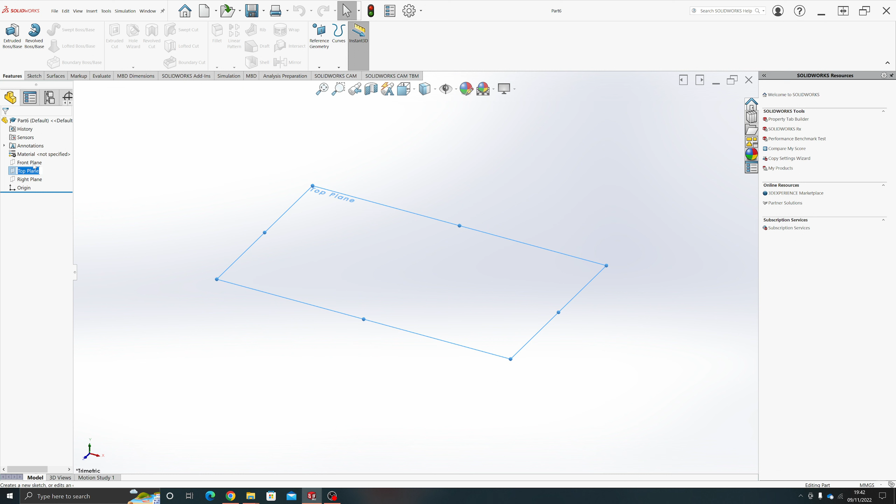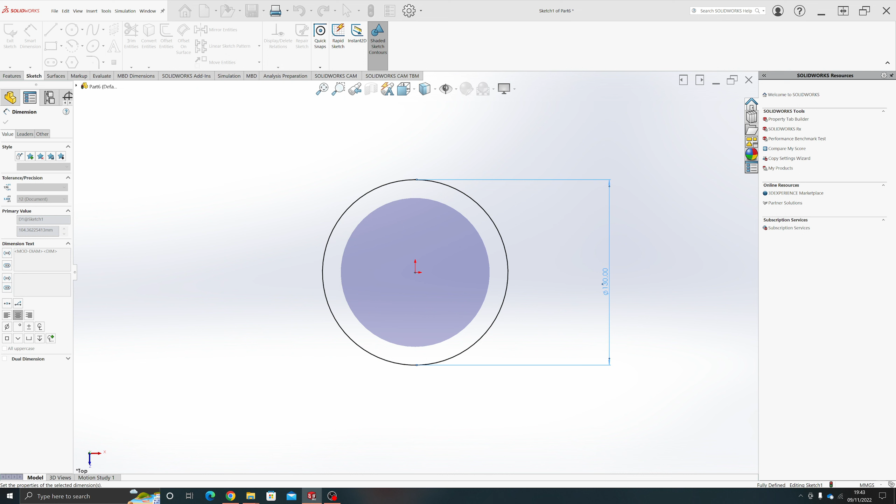So we're going to start on the top plane. What we're going to do is draw the base first, so I'm going to do a cylindrical base like so, and smart dimension this. This is a nice, quite quick, easy one to do. For our dimensions, I'm going to do mine as 130 millimeters diameter. I'm going to do a feature, just extrude that up, and make this 12 millimeters thick. So it's quite a good size base like so.

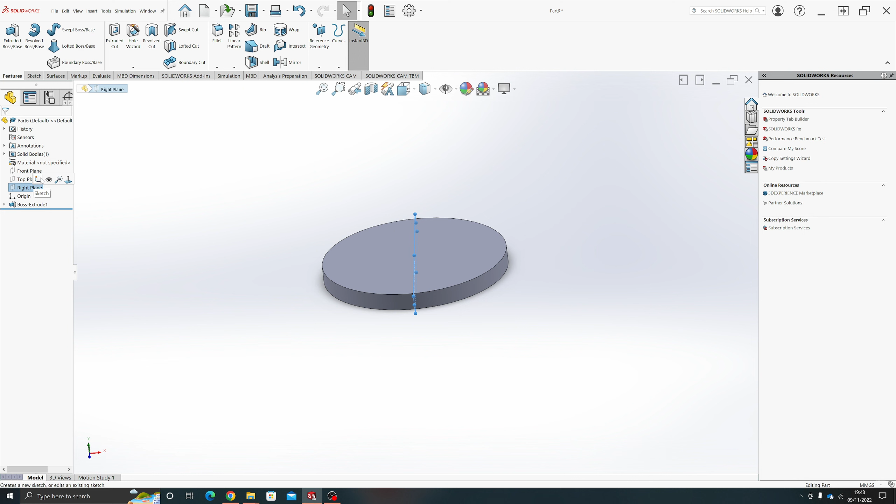Okay, and then I'm going to draw on this face here really - actually no, I'm going to draw on the right plane instead now, and we're going to do normal to. Just ignore the fact that this plane is actually down here - you can drag them up, but just remember that planes are actually infinite. They will stretch and change shape as you need them to when you're doing your design work.

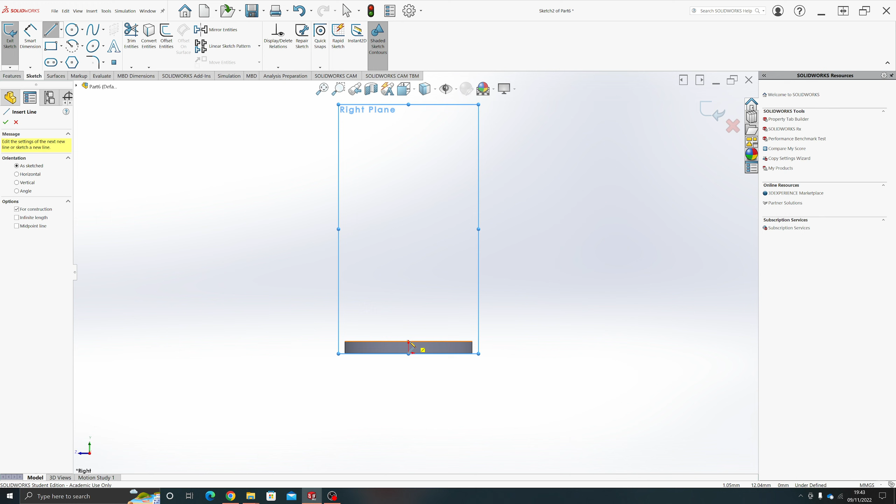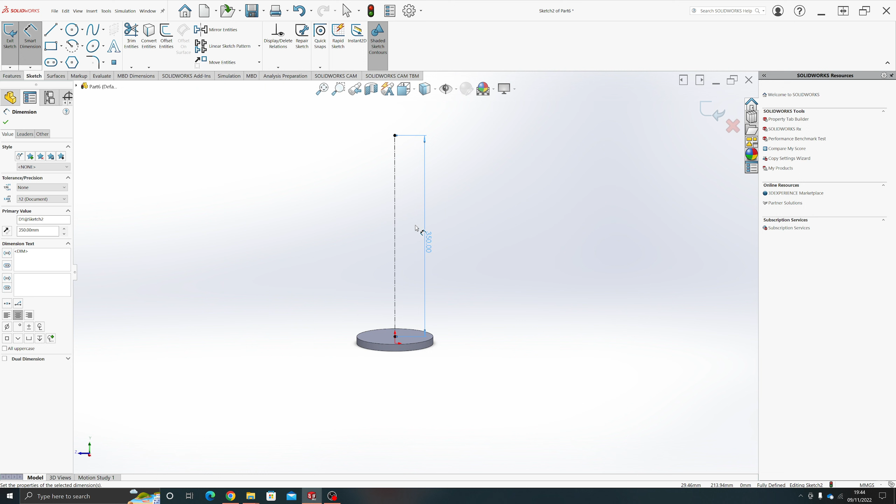I'm going to add a construction line, and start it in the middle, so I'm going to find the center point - you should see it goes orange. I'm going to add a construction line, this is going to go up 350 mil, like so. Afterwards, if I need to, I might change the size of my base a little bit, but we'll look at that after. So what we're going to do basically is this construction line is going to be used to rotate our object around to get the shape we want.

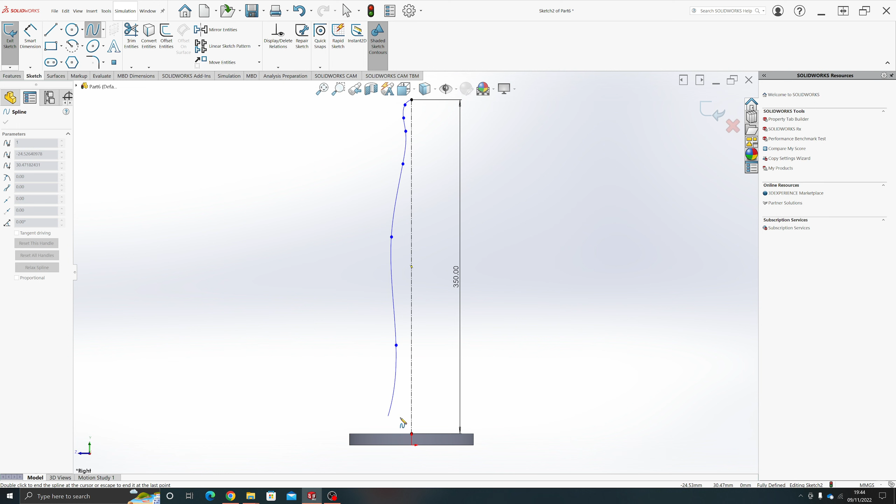I'm going to use this tool here, this is called the spline tool. If I click at the top point here, what this allows me to do is create a kind of interesting curved shape of some kind, and then I'll have it go down and attach to this bottom line here. Now each time I click, it adds a spline point, and you can see them on here as little crosses, and what that means is I can actually stretch and shape these now.

So it can be a bit troublesome if you have too many of these, because then every time you move one, there's a lot more points that kind of move as well, and as you move further down, they impact the whole of the product. Do make sure that you're selecting the point and not the line - if you select the line, it will try to move the whole actual line, whereas if you move just the smaller part, it will just move that point instead.

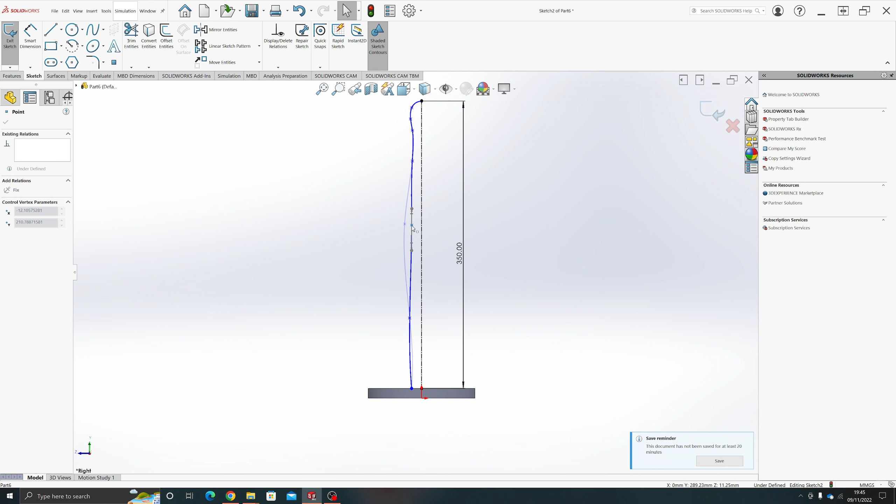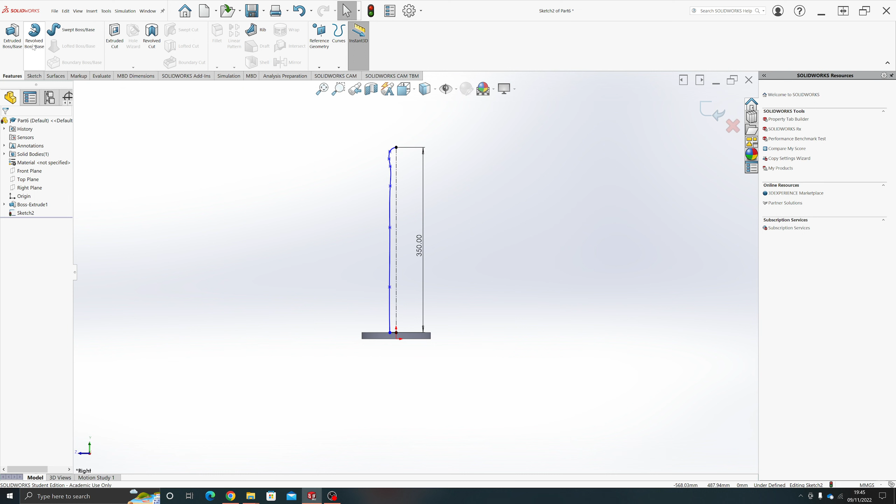So you can have a bit of a play around with the shapes, get to a shape that you're happy with, like so. Then what we're going to do is connect this line to the bottom of our construction line - you should see it connect here. Press escape. Then we're going to go into features, and we're actually going to go into revolved boss base. Click that - what this is telling me is that there is a sort of gap somewhere.

If I push yes, it's going to try and fill it in and find where the gap was. It could have been a gap at the bottom, it could have been a slight gap at the top. If you click yes, you run the risk that it's going to do a random line straight through the middle or something. So you can push yes, but sometimes you'll have to undo it and then try to change it afterwards.

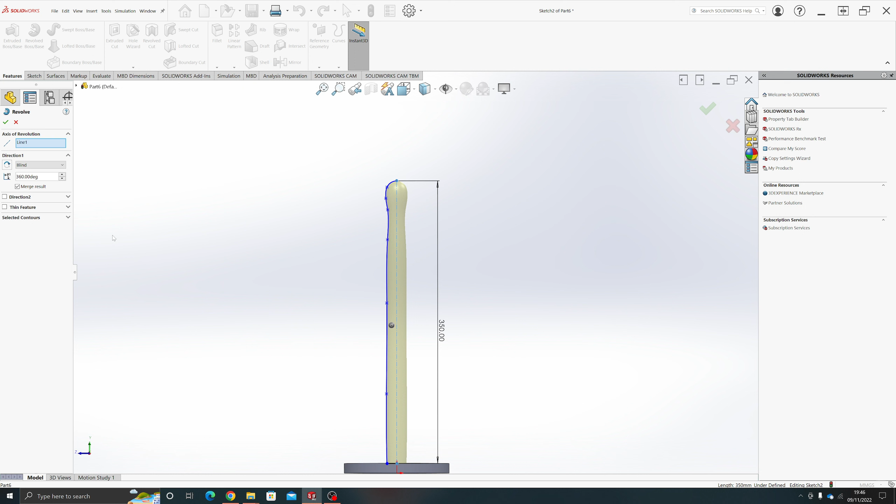Now what's quite nice is, as you can see, it means I can actually see kind of what this shape is going to be. If I then push the green tick, you'll see that it's created that shape - quite a nice simple shape really.

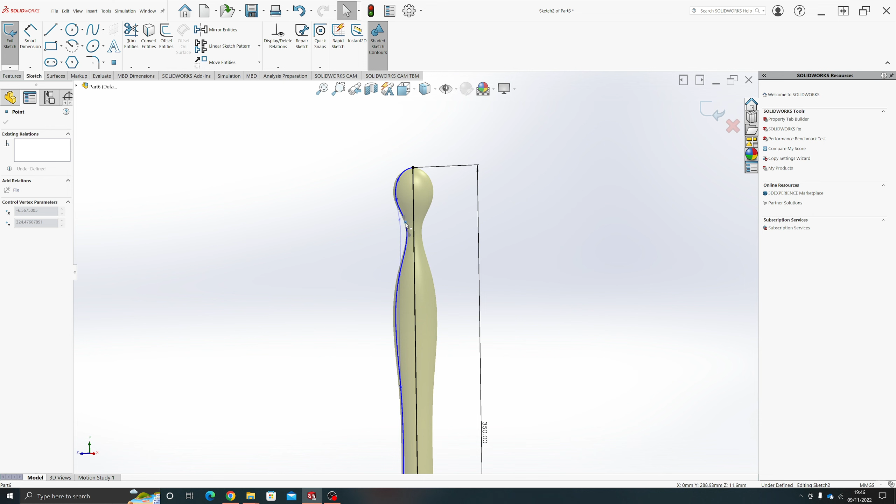You can add more details now if you wanted to, so you could go into edit sketch and actually change the shape of this now. And because you've got the revolve already done, it means that it will actually update it as you go through and make little modifications to it. And then when you exit the sketch, it will fill it in.

And then say if I wanted to change the size of the bottom, I could go into edit sketch, and I might decide I want to make this a little bit bigger, so I might make it 140, and then exit the sketch. And then you've just got your kind of basic shape.

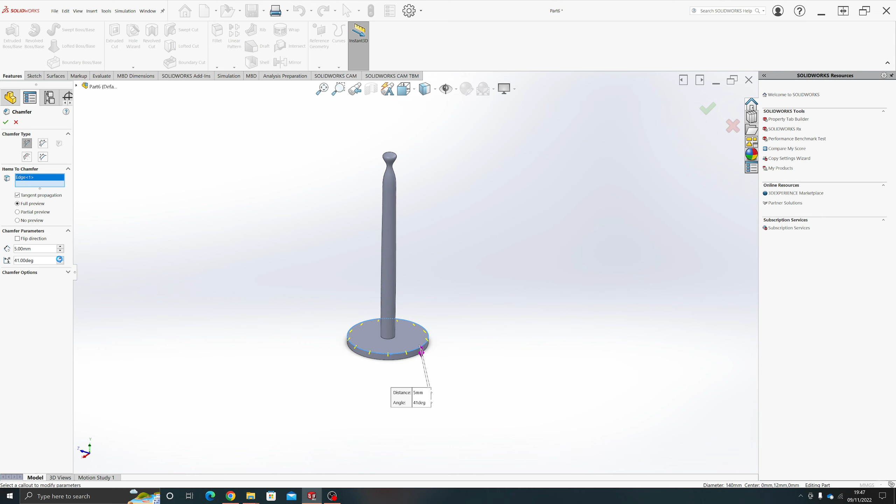But that does give you an idea of how to revolve different objects. You could then decide if you want to add a chamfer, chamfer the edge of this, maybe change how much it's chamfering by, and change the angle as well. So you could have just a 5-degree angle or something, and it will make it a much smaller shaped angle. Okay, so it is just about trying out different parts on these.

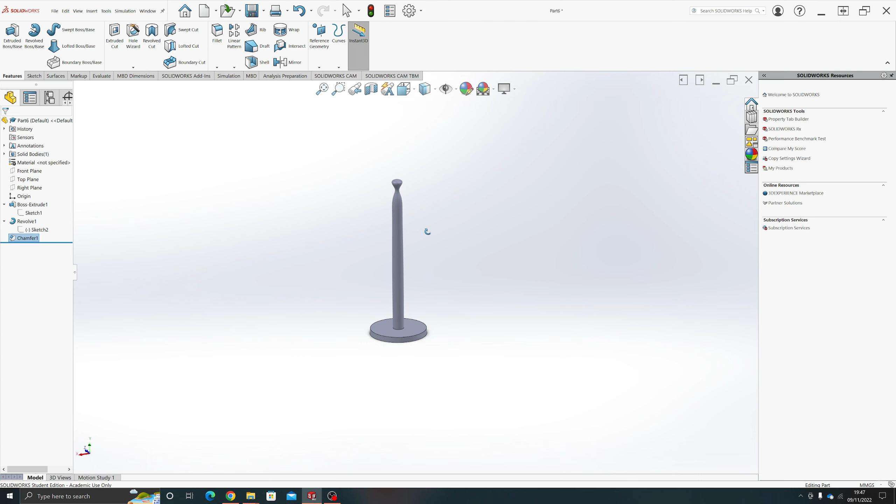You'll see that it's got a nice little chamfer on there. But that's how you could create an object, just a nice simple one, for those of you that might need to add anything that revolved really, or revolved features or something like that to your design work.